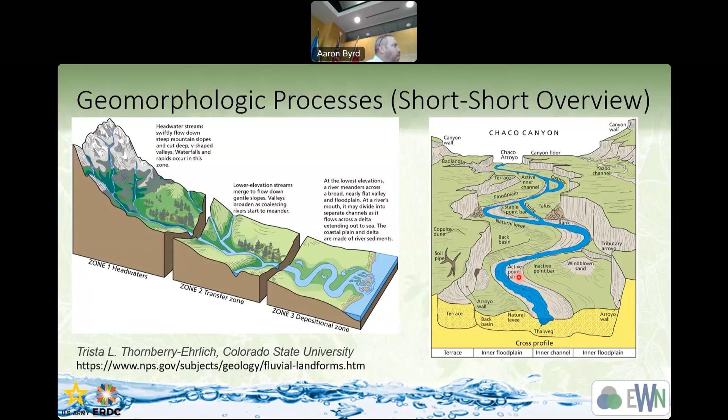Tack onto this the ecology. Gravel beds right here, if you're in the Northwest, that's where your salmon spawn. If you don't have those gravel beds because you've altered the ecology and the sediment movement in your system, you've just killed hundreds of thousands of salmon out of your rivers. So understanding how the biologic and ecologic processes fit together with the sediment and the hydrologic processes is important for understanding these systems and how we engineer them with nature.

So, scale and scaling in hydrology. I spend a lot of time talking about this in advance. In hydrology, we have a challenge where we cross multiple scales, from microtopography to giant river systems, mountain ranges to small hills, everything in between. So we move water and sediment across multiple scales, and that's both a challenge and an opportunity.

So for a model like GSSHA that lets us get at those different scales, it's a good thing. We can start to dig into what are the different processes that happen at the different scales. How do they work? How do they move water, move sediment?

So if you think of all the stuff in between the rivers, that's land cover. That's where we're having the overland flow runoff. We're getting that real thin sheet flow on a really good day. We've got some microtopography, little rills, little pockets of water moving around. Land cover is going to be the biggest influence we can have there. You're not going to throw in a dam and influence a whole lot of space upstream, because it's all very thin, just the topsoil layer that you're working through.

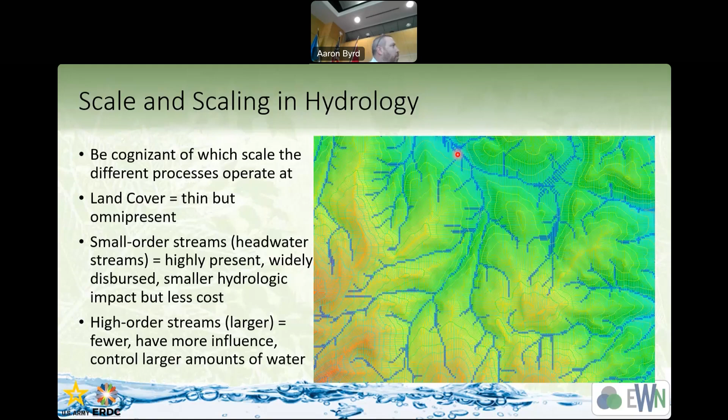And this really gets to the fractal nature of stream networks. So fractals are really cool. They're sort of this mathematical way of thinking through things. So this is one such kind of fractal that's a tree structure. Okay? So really you just take one line here and then split it two, split it two, split it two, split it two, and sort of keep going. That's all it is.

So here is the GSSHA watershed that I showed you way back when yesterday. It's like forever ago. Let's start down here with one and it splits into two, and that one splits into two, right? That's kind of how this goes. So the paper talks about the fractal nature of stream networks. I think this is a helpful way of thinking through different scales and how you have to think about how they transition across the watershed domain.

So first we have this ring on the outside. Notice I've got the space out here. That's all the stuff that's not part of the stream network, right? And then we've got all the little bitty, tiny first order, maybe some little second order, little bitty streams. That's on the very outside fringes of our fractal tree here.

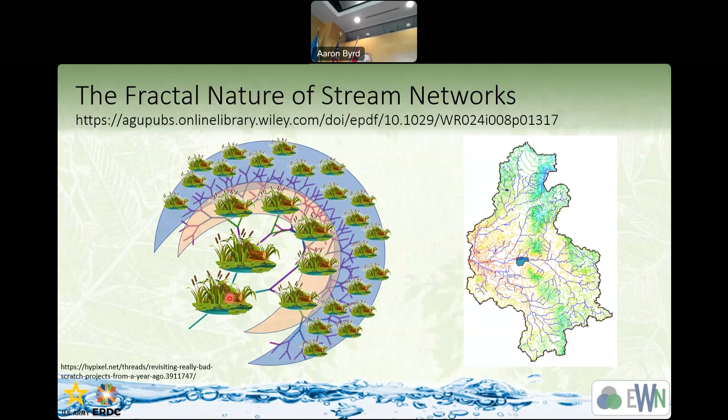So here's the Kishwaukee watershed. So if you notice, the watersheds are different sizes down here, right? Some of these are different. This one has a lot of urban areas. This one, more urban areas over here, small watershed, there's wetland here. More medium-sized wetland here, moderate urbanization. Here's a very large one, and it's targeting way downstream.

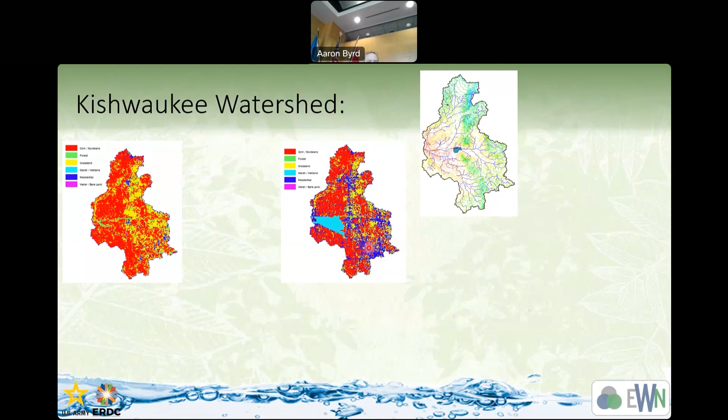So this one that was large and very far downstream was the one that had the most impact, because it actually aligned a big target area down low in the fractal domain of the watershed. Whereas the others didn't have a lot of impact because they were much more diffuse, targeting those upper leaf little branches with all the little tiny changes that were much more minor.

So the Provo River watershed, this is one of those bigger ones where engineering and nature are put together, right? The Provo River restoration. The Provo River used to look like this. It was just straight. Back in the 50s, the engineers loved nice, very straight everything. Efficient. So you can see right here, this was the old stream bed.

So they spent a lot of time and effort to buy all the acreage here, to dig out and make this thing continuous, to put in all of these little side channels, a large scale project to restore habitat. So this was really looking at how they can restore habitat for trout, turning a barren, very simple ecosystem into a complex ecosystem that supports a wide variety of fish, plants, and people wanting to come enjoy it.

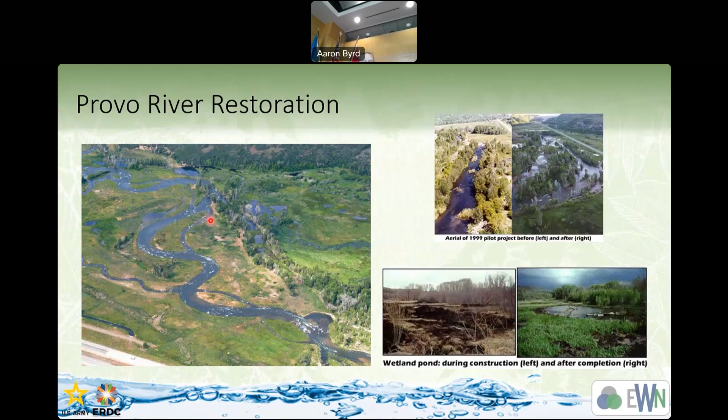So there's wetlands now. All these little things like riffles here, riffles here, riffles down here. That's where all the trout like to spawn. So big projects. Where is it? It's actually between two really big reservoirs. This is all mountain, so right about here is that project. So it's further down, right? So it's more at the right scale for capturing things, and it helps that they've got a reservoir right here that has a mandated release, so they can have environmental flows.

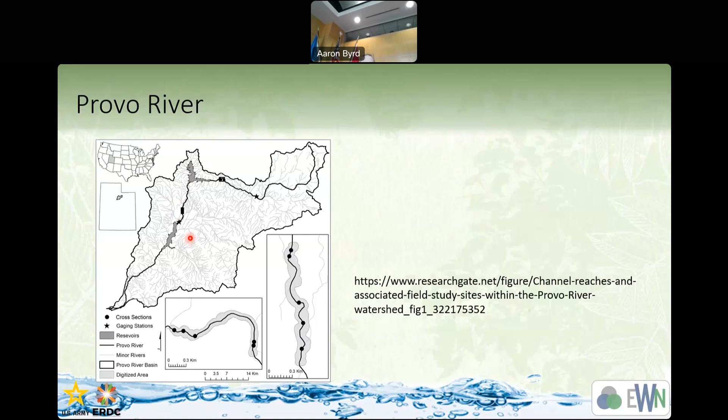So on the other spectrum of things is the city of Detroit, which really shocked me. I'll be honest, I was not expecting this out of the city of Detroit. But the Detroit district asked me to help with a project, so I started looking into this, and I came across this and was blown away. So all of these, like 269 projects. They've got a nice mapping interface. You can zoom in and see all the projects.

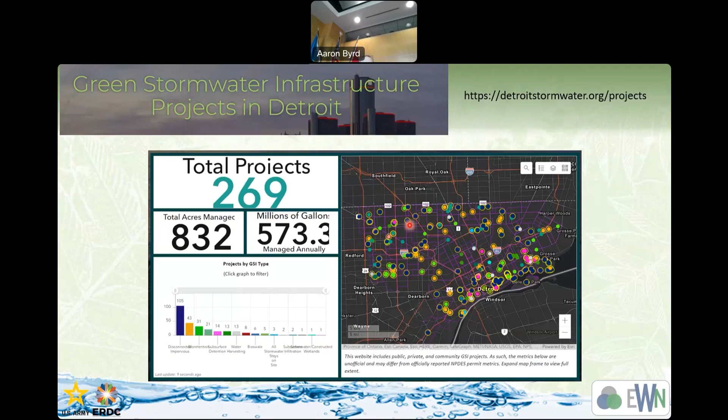But these are all little tiny, targeted local projects. These aren't hundreds-of-acre scale projects. These are a third of an acre at best, right? But they have a lot of them, and this is targeting all the little tiny branches on that scale. So they have a lot of these bioretention swales, just next to the edge of a parking lot or along a road. Spend money to build a little retention area, put some grass, trees, some plants in it, make it look nice, retain water, provide some greenery, cool the area, and it's all pretty good.

These right here are actually abandoned houses. So the city bought the lands, took out the old abandoned house, and put in these bioretention ponds. So there's actually plants right here. You can't really see the diagram here, but they dug out and made a bioretention space, so there's a space underneath for water to come and sit there and eventually infiltrate into the earth.

So the little neighborhood here, now the runoff from the storm flows into this water retention pond instead of off into the road. Right. So they have hundreds of these, right? That's these little disconnects, these little tiny projects. They sort of capture the idea of we need a lot of these little targeted things.

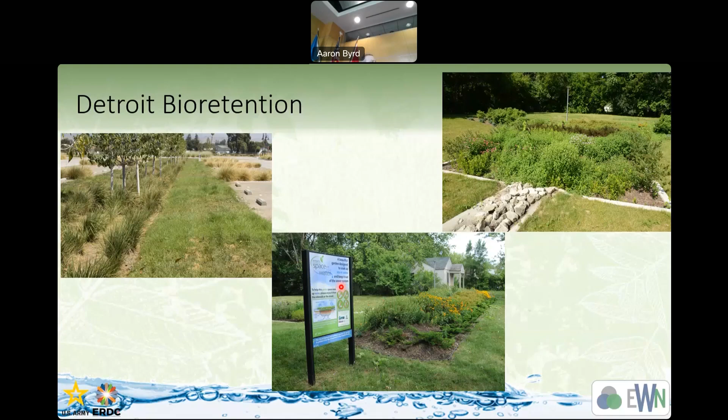I didn't even know we could do this with asphalt, but sure. I know you can do that on the road. I know all about the parking. I've never seen that. Yeah, no, this is really cool.

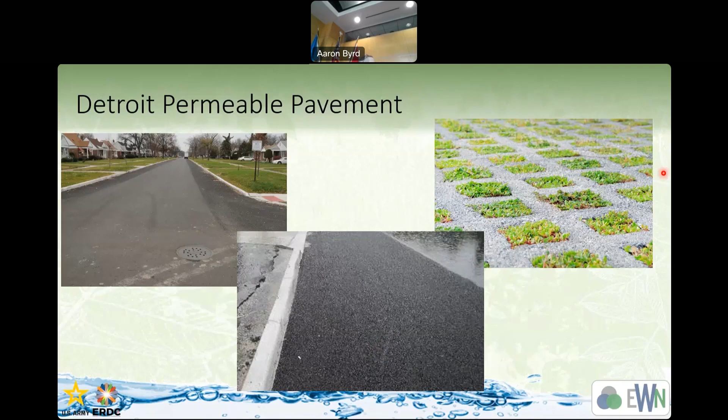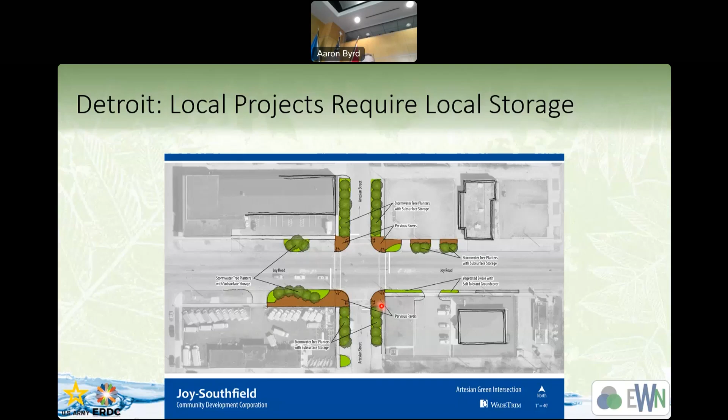So all of these right here, the pervious pavers, all these have subsurface storage. So they can capture the rainwater, let it infiltrate, and not feed it to the big giant stormwater system. So, City of Detroit, like I said, blown away. So really impressive how they really tackle this.

One of the things you have to sort of think through is where in the watershed do we possibly transition from one process to another process. So if you sort of think in terms of complexity of process, what's moving the water? How is the water moving? What are the major conveyance systems that are moving the water, right? So at the very beginning, we've got overland flow, right? But at the very beginning, we don't even have overland flow. Water is just sitting there in the retention depth, right?

The little microtopography. And then we finally get enough of it, and we switch from it sitting there in the microtopography to now we have overland flow. Eventually, we get enough overland flow that we switch from sheet flow to now we have a stream. In the case of a lot of cities, they'll switch from we've got a stream to now we've got storm drainage. Right? And if you get enough, well, now we're going to go back the other way, right? So maybe we've got our stream, but our stream is overflowing, and now it's back onto the overland flow. Right? So we switch processes that are moving the water in time and in space.

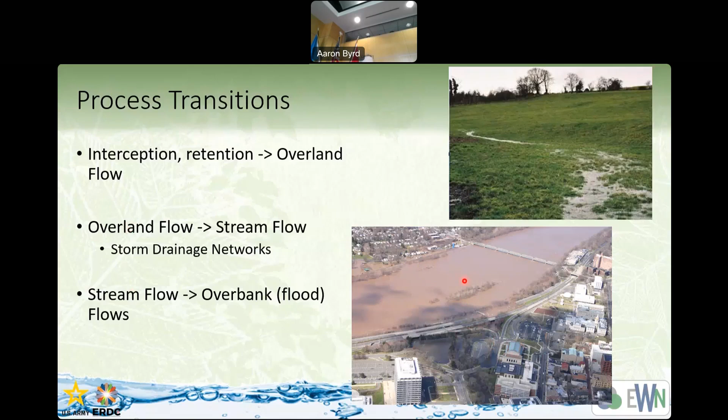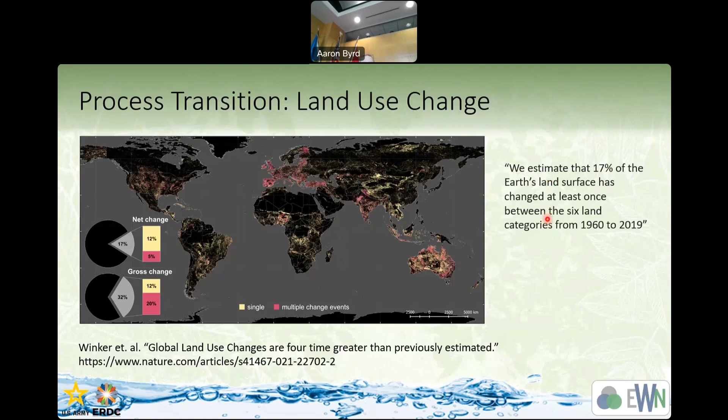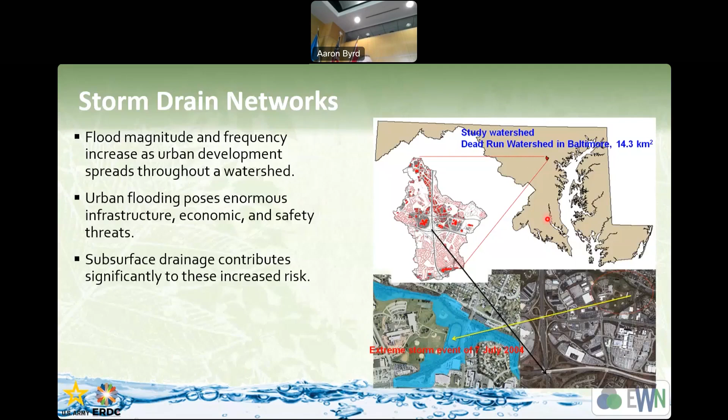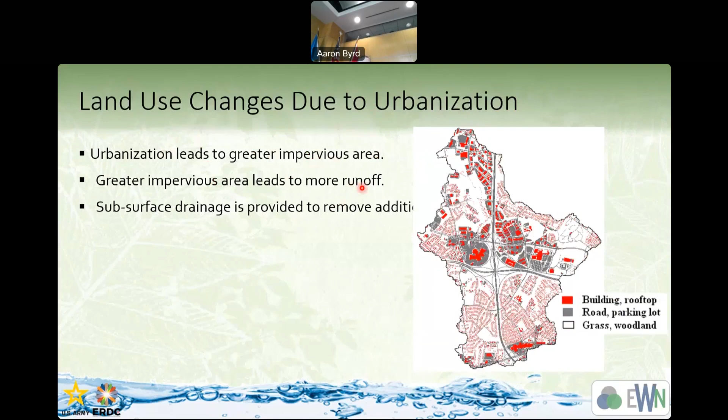So urbanization, as we all know, means lots more impervious area. But everybody, cities like to put in subsurface drainage. City of Detroit, they no longer have streams. Everything is subsurface drainage. They don't have streams. At the same time, the geomorphological changes in the watershed, right? All the urbanization changes the topography, the connectivity of different parts of the land, how it works. So none of the natural drainage is being charged. And thus, because everything's restricted and less pervious, right, you get more runoff.

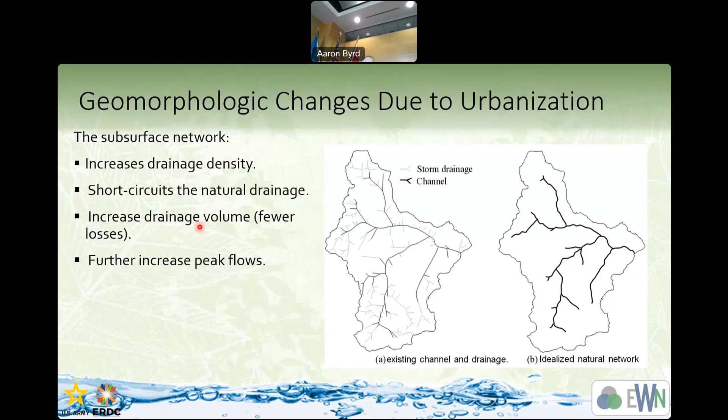So this was looking at the drainage system, sort of testing it. Here is the existing channel and drainage network. Here is a channel network. So the drainage density, you take the linear length of all of the stream network, pipes and all that, divided by the area of the watershed, right? So we get it the same. So comparing just streams to pipes. Same amount of stuff. What's the difference?

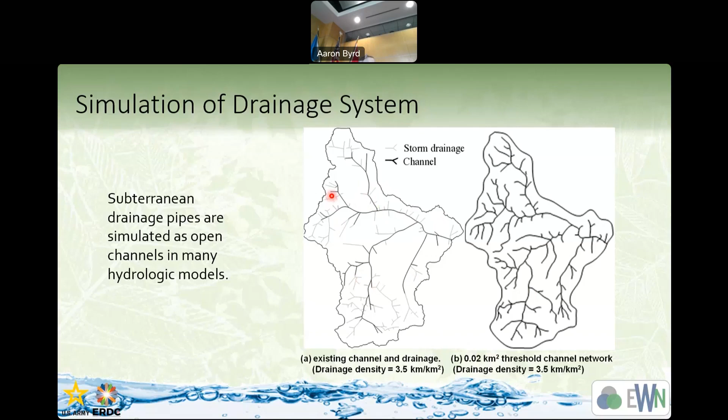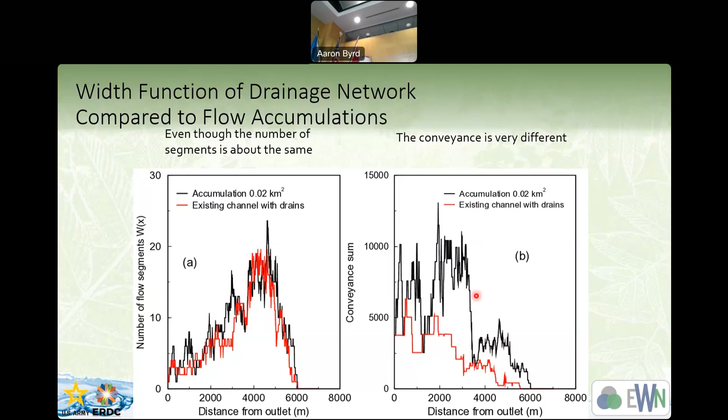They even went through the process to show where in the watershed, how far from the outlet, is the stream versus the pipes. It's the same. Pipes are kind of in the same general locations as the streams. But how much water can actually move at those locations? You move so much less with the pipes. So your conveyance, how much water you can actually move, even though it seems like you have all the same amount of stuff, is completely different. So open channel network conveyance is way bigger than the storm drainage.

So when you send a big storm, the big storms easily overwhelm the pipe network, and flow changes back to whatever else is there. In this case, nothing, because it's all paved over. So now it becomes flooding in your neighborhood. So this is just one of those examples where we have a concrete study of how big of a flood a particular subsystem of your watershed can handle. But thinking through that, the concept applies to all the different subsystems.

They can only handle so much, right? So if you have wetlands in your watershed, they can only handle so much. They can't handle the big storms. If you've got infiltration basins, they're not going to handle so much. Your retention basins, all going to handle so much, right? All these things have their natural scale at which they operate.

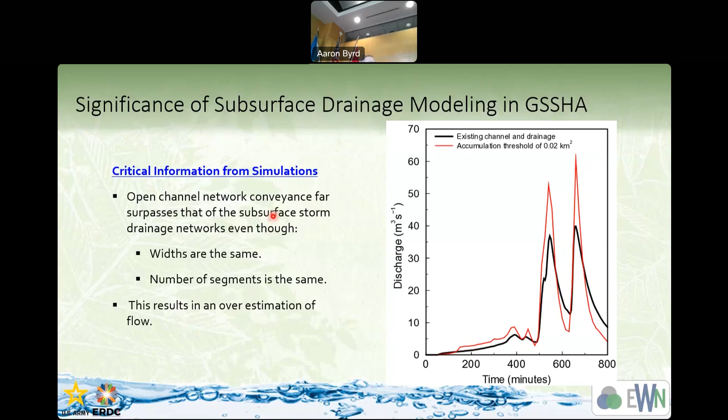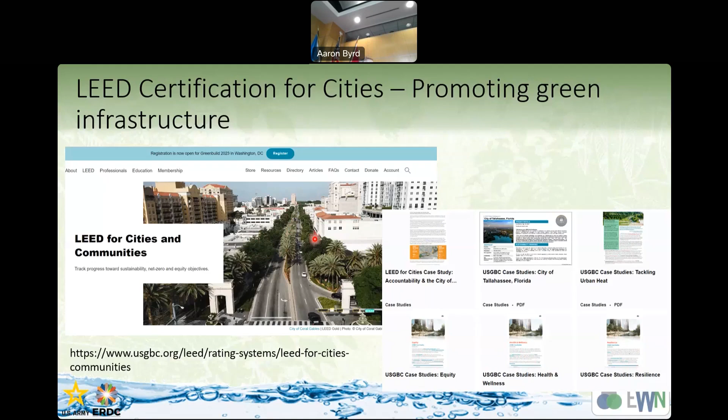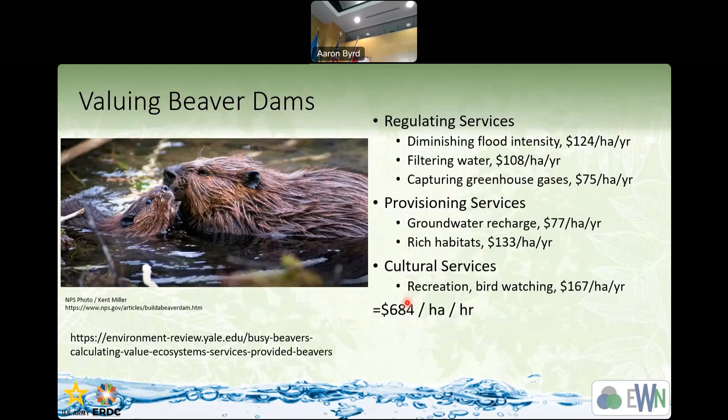Now, Noah has a stream running through his backyard, and the beavers come up and build a beaver dam in his backyard. I'm guessing Noah would not be happy to see the beaver in his backyard, right? Because it's going to flood out his house and probably chew up all of his trees. So there's the downside of beavers.

Beavers are going to pick the easy spots to build their dams, right? So if you've got a culvert or something, they're going to be like, score, right here. So that's not so helpful, right? And then they'll build burrows. They have burrows in water or in banks. It depends on how steep and how fast the water is.

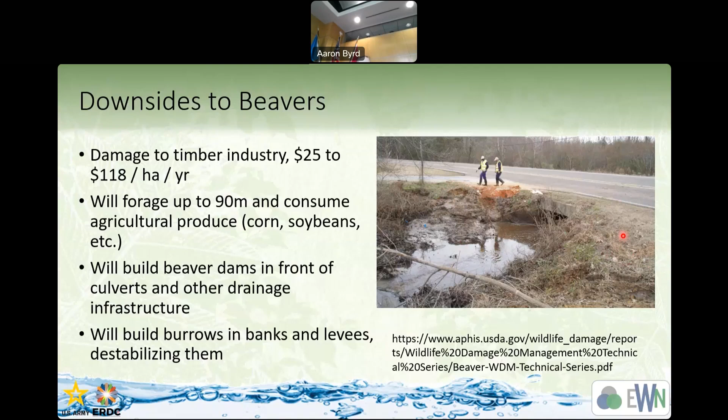But they'll build burrows in the side of the levees where there's a road, right? At which point you're now further damaging your roads. So bad thing. So there are downsides to beavers. It's not like beavers are the magical panacea. So there are a lot of programs to help control and manage beavers or kill beavers.

And you'll see these are really successful in sort of wild areas, right, where you want flooding, and you want the water to be backed up and spread around and start to develop from simple ecosystems to complex ecosystems. So they have a different way of doing this.

There was an engineering with nature conference out in Yuma, and there's a lady that came and presented. She was a landowner of an area in Arizona. She embraced this concept. She went hog wild. She built like 300 pseudo beaver dams, but out of boulders. She got a little excavator, moved boulders into the stream.

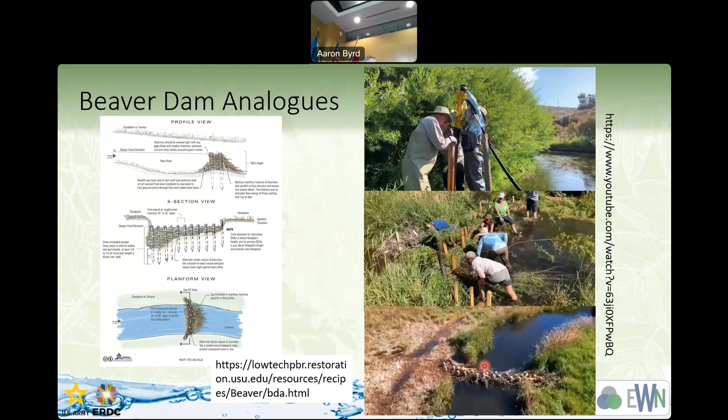So this is another technology that can be applied to engineering with nature, right? We're going to manage ecology, we're going to manage water, we're going to manage geomorphology, and put it together. Sort of put different ideas together and think through where on the spectrum different kinds of these practices work well together. So beaver dam analog, you're probably in a higher order thing, right? If you're down here, you're gonna have a pretty big beaver dam, right? So probably somewhere up here.

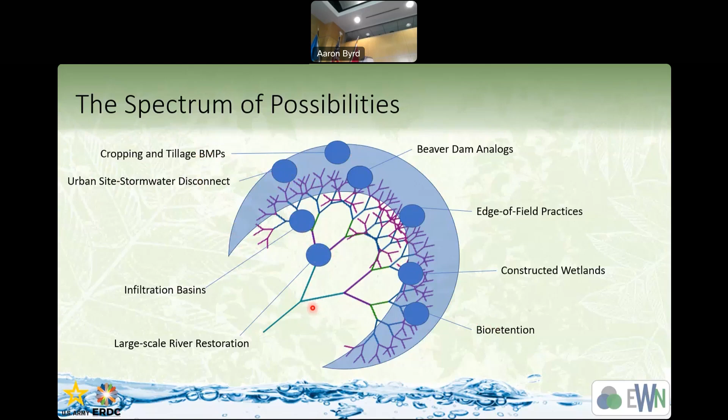So you're gonna target sort of higher order things here, right? Urban site stormwater disconnects, bioretention stuff, cropping and tillage BMPs. It's not until you get to your bigger infiltration basins or your large scale river restoration that you're more down lower in the watershed with your projects.

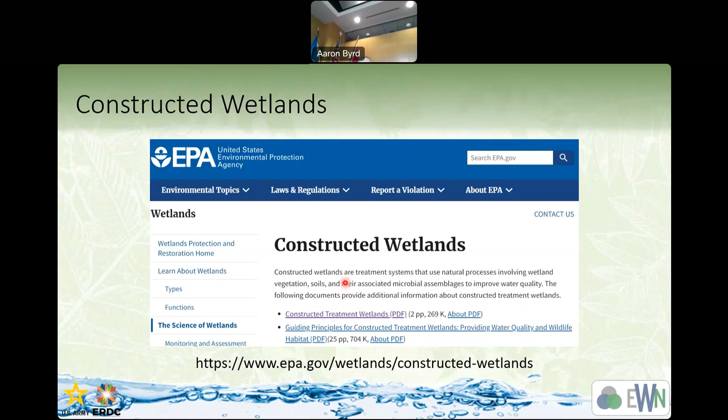The last few are really just some guidance, some links from the EPA. I was surprised they had a really good number of instructions on how you actually build these things. Principles to think through that make it successful or not. So here's one for how you make constructed wetlands. Lots of guidance there. And they even connect to regulatory issues and waters of the United States, and how that all ties together.